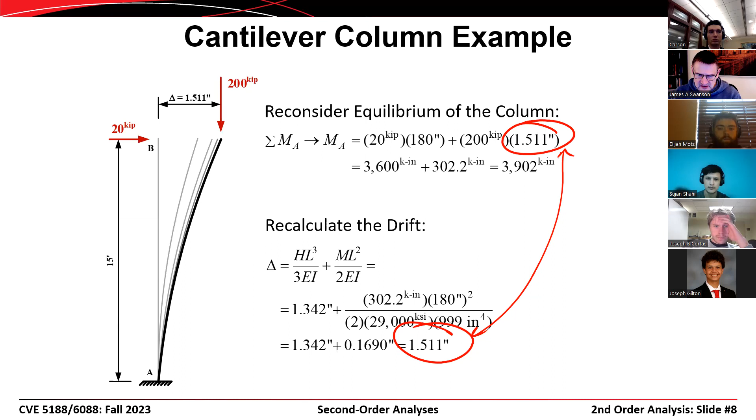That difference can mean the difference between a member being satisfactory and a member being not satisfactory. And so it can be important to model that.

Then we went on and considered a more sophisticated structure, one with two columns instead of one column, and illustrated the idea that the second order effects in the building aren't just isolated to the members that are participating in the lateral resistance of the structure.

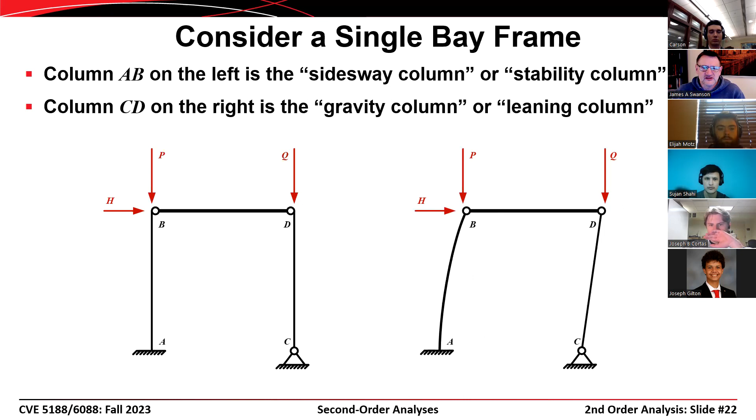We often, particularly in steel structures, break our columns out and categorize them as either columns participating in the lateral resistance of the structure—lateral columns or side sway columns—or columns that are there just to carry gravity loads, called gravity columns or leaning columns.

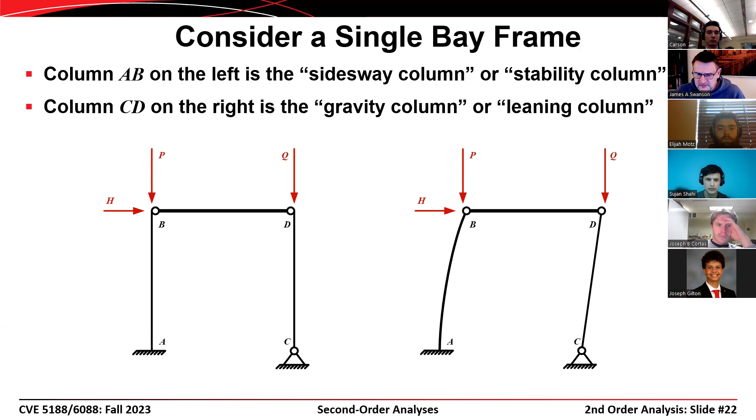We presented this rudimentary example where we have the load on the leaning column Q that acts to destabilize the lateral column. The column providing lateral stability, column AB, is actually carrying the load that is on itself plus the load that's on the leaning column.

Then we went through and did some examples in SAP 2000, and I showed you how to turn on the P-delta analyses and what you have to do with respect to automatic meshing in order to capture P-little-delta effects, et cetera.

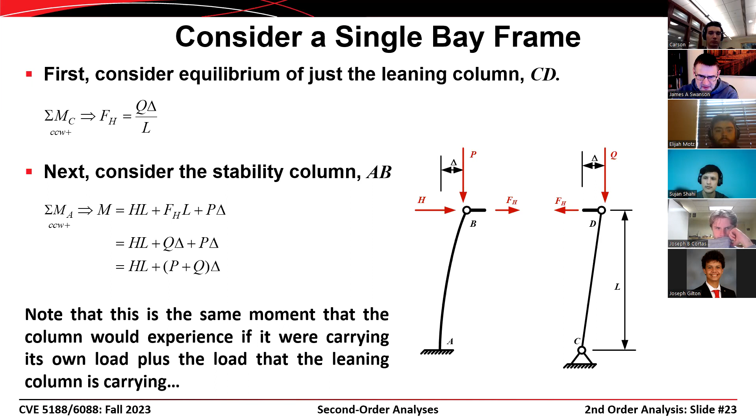What I wanted to start off with today is circle back to this presentation and wrap this up and talk about how we handle analyses of structures from a practical point of view.

This is later on in the presentation—I don't think we've covered this yet. We have slide number 33, where we're illustrating again the idea between a P-little-delta analysis on the left, where little delta indicates a deformation along the length of a member in between nodes, and P-big-delta effects there on the right.

This is a topic that's evolved quite rapidly over the past 20 to 30 years, certainly in the context of AISC, but probably also in the context of ACI, and the terminology has changed quite a bit as well.

If you go back a few editions of the standards, the situation on the left would be referred to as a non-sway analysis, or NT for non-translation. So non-translation, non-sway—two different words that just act to confuse things.

The one on the right is a sway analysis, where you could envision a moment resisting frame being pushed to one side because of lateral loads like wind or seismic. We used to break these down in terms of a non-sway or NT analysis and an LT or sway analysis—lateral translation versus non-translation.

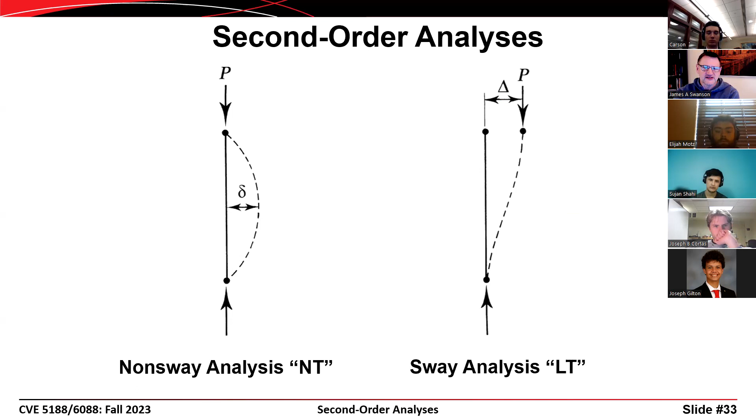These geometric second order effects aren't the only types of effects we can account for. We could include material nonlinearity as well. All the models we've considered so far are based on the idea that the material is linear and elastic.

We provide a modulus of elasticity, we might provide a shear modulus of elasticity, but what we don't generally provide is a yield stress and/or a tensile stress. So what we could do is define a full stress-strain curve for the steel or concrete from which our structure is constructed.

That would give us a nonlinear response, not necessarily with respect to geometry but instead with respect to material. You can include both, though material nonlinearity isn't as convenient or as easy to illustrate as geometric nonlinearity, and when you do, you increase the complexity of the model even further.

When we talk about types of nonlinear analyses, we have both geometric nonlinearities and material nonlinearities as well. When you move from a first order linear elastic analysis to a second order inelastic analysis, you increase the complexity of the model quite a bit.

SAP 2000 does offer the option of including material inelasticity or nonlinear material analysis, but it's not as sophisticated as a program like Abaqus or ANSYS would be.

You have to define locations where you expect yielding to occur, and then set up something called an analytical hinge or a FEMA hinge. FEMA is the Federal Emergency Management Agency in the US.

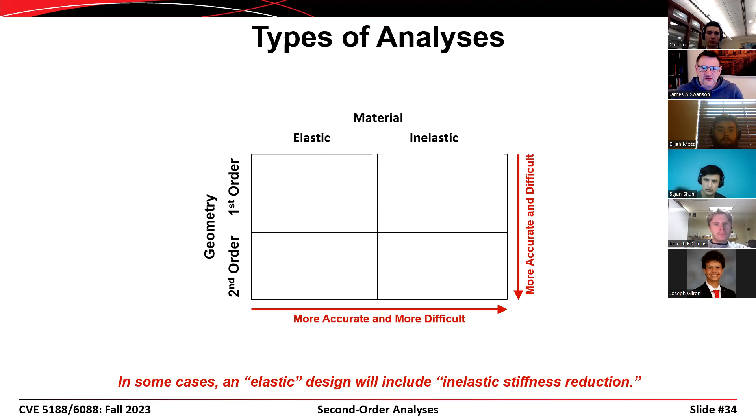They were one of the first groups to define an analysis where you define these hinges or hinge locations within a structure, and then as you apply the loads, you can capture the potential for that material inelasticity to occur.

Different material models include an elastic model, the simplest, where you just have a linear relationship between load and displacement. And then you could have an inelastic analysis.

With the inelastic analysis, you could have an elastic, perfectly plastic model, an EPP model. If we illustrate that, the stress strain curve would show stress that's linear up to the yield point, F sub y, and then perfectly plastic beyond that. So this would be an EPP model.

You could have a more sophisticated, but still not perfect, model where you have an elastic range, a plastic range, and then a hardening range. The hardening stiffness is usually about 10% of the elastic stiffness. This would be an elastic plastic hardening model, an EPH model.

In a more sophisticated program like Abaqus or ANSYS, you might define a true stress strain curve. But in that case, you're usually using the true stress and true strain as opposed to engineering stress and engineering strain. The engineering stress and engineering strain are based on the initial measurements.

If you're doing a coupon analysis, you would measure the initial cross-sectional area of the coupon and then calculate the stress throughout the loading based on the original area. Whereas if you were calculating true stress and true strain, you would continuously update the area you're dividing by to calculate the stress as that cross-section shrinks due to Poisson's effect or due to necking based on inelastic behavior.

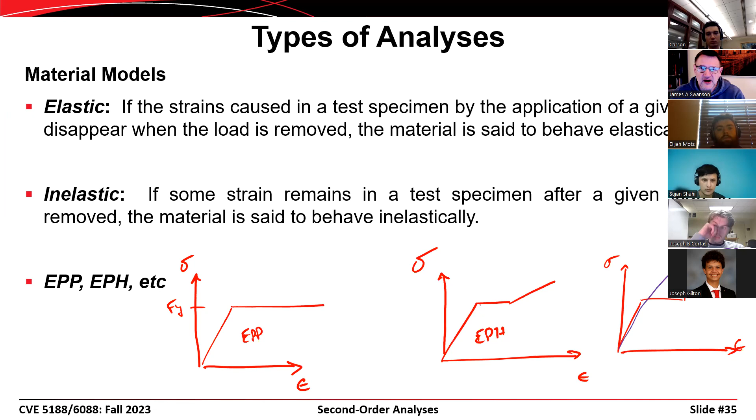If we look at older terminology, we break down the determination of our moments like this: we have a B1 factor times our non-translation moments, and a B2 factor times our lateral translation moments. B1 is a factor that approximates the second order results from a P-little-delta analysis, and B2 approximates the results from a P-big-delta type of analysis.

This is included in an appendix to the AISC standard now, or AISC specification. It's called an approximate analysis.

If you go back 20 years to the 1999 edition of AISC, or maybe even the 2005 edition, this was presented as the default approach for calculating second order effects, because back then we didn't have the capability of running a second order P-delta analysis on a desktop computer. That type of analysis required what we'd call a supercomputer nowadays, and it just wasn't a practical option for most practicing engineers.

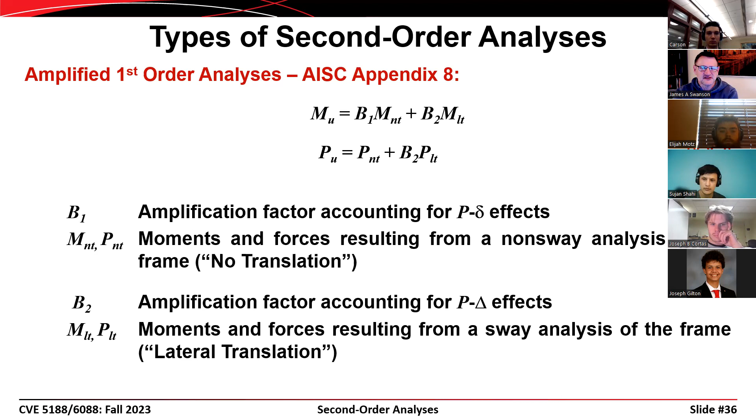But now that we can do P-delta analyses on a desktop computer, this becomes something that's somewhat outdated. Since AISC wasn't ready to completely dispose of it, they put it into an appendix so it maintains its applicability. I suspect that sometime in the near future it will probably be deleted entirely from the standard.

If we look back at the packages we've been discussing, Visual Analysis does a P-delta analysis, but it doesn't do a true rigorous second order analysis. It does a standard first order analysis to calculate the deflected shape of the structure, and then it goes through a second pass based on that deflected shape to estimate what the second order effects are going to be.

SAP, on the other hand, does a true second order analysis where it incrementally applies the load, and then at each load increment, it iterates to find a convergence to a certain criteria.

I think most people would agree that SAP 2000 does a better job of handling this. If you read the fine print of our standards though, ACI and AISC, they don't necessarily say that it has to be a true rigorous second order analysis that we use. We just have to have confidence in the results that we're getting.

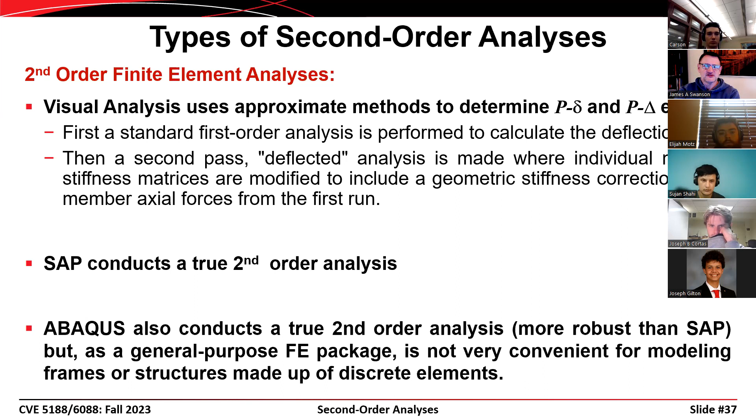And thus you go back to the benchmark problems that we discussed during our last class. If your analysis package can come within a few percent of the benchmark results, then it doesn't matter whether it's an approximate second order analysis like Visual Analysis provides, or a true second order analysis like SAP 2000 provides. ABAQUS, my default continuum modeling program, does a true rigorous second order analysis and is much more robust than SAP 2000. It offers several different solution options, including Newton-Raphson, modified Newton-Raphson, an arc length method, and all kinds of different options that are well beyond the scope of our discussion here.

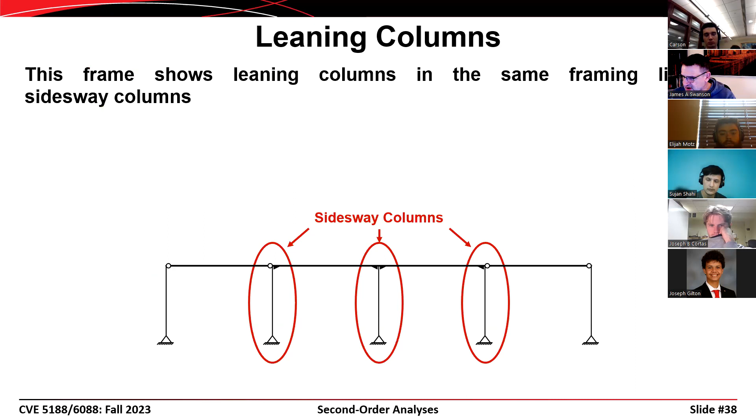If we put that load on again and look at the bending moment diagram in these 2 outer columns, those columns wouldn't carry any bending moment at all. So their flexural stiffness does not contribute to the stability of the structure. Those are leaning columns.

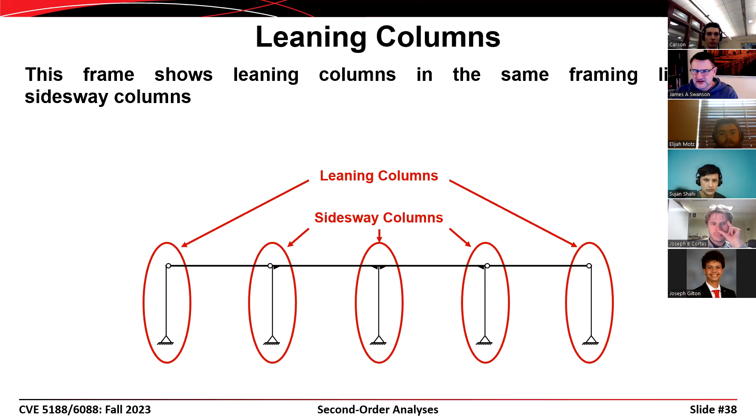We often want to account for leaning columns, but it's not always convenient to model explicitly every gravity column that's in our structure. So one approach to doing a 2D model is to have all of the leaning columns represented by a single column line in our building. We would take both of these leaning columns in the actual structure and put their loads on one hypothetical or analytical column line called the leaning column line. That seems somewhat ridiculous to do when we're looking at a 2-dimensional structure like this one, where we could just put both columns in there.

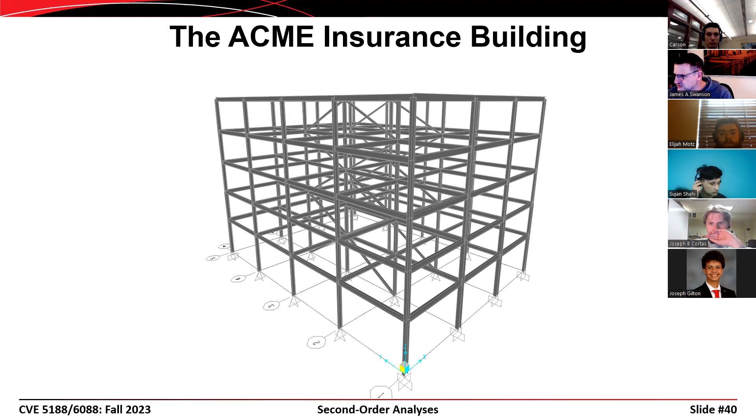But when we go and look at a 3-dimensional structure, the utility of this approach becomes more apparent. This is an old structure that I used to use in steel design, but I've more or less retired it. Let's go ahead and use it as an example anyways. I call it the Acme Insurance Building, just for lack of any originality in naming these structures.

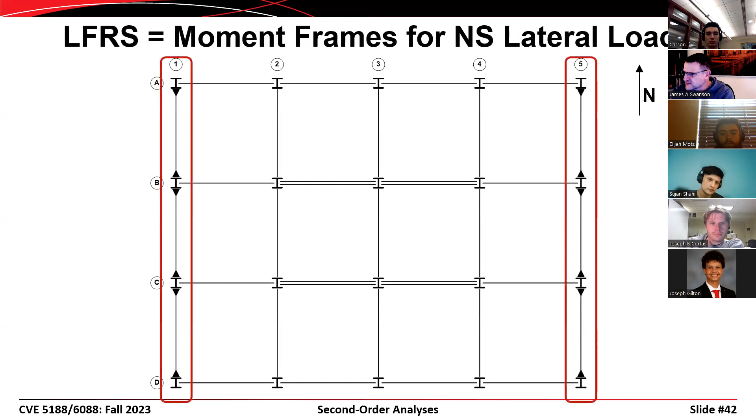It has lateral framing in the north-south direction that's composed of these moment resisting frames on framing line 1 and 5. If we take a look at those moment frames, you can see there's rigid connections everywhere. So if we put lateral loads on here, you'll see bending moments in each one of those members.

If we look at the lateral framing in the east-west direction, I have 2 brace frames, located near the core of the building. That would probably be more typical than having the brace frames near the perimeter like we have in the Tower of Terror. If you have the brace frames out on the perimeter, they do a better job of resisting the torsion the building might see, but it's challenging to accommodate them architecturally because the braces tend to pass through windows and things like that. If you put them near the core, you can hide the brace frames in elevator shafts and things of that nature, and you don't actually see the braces.

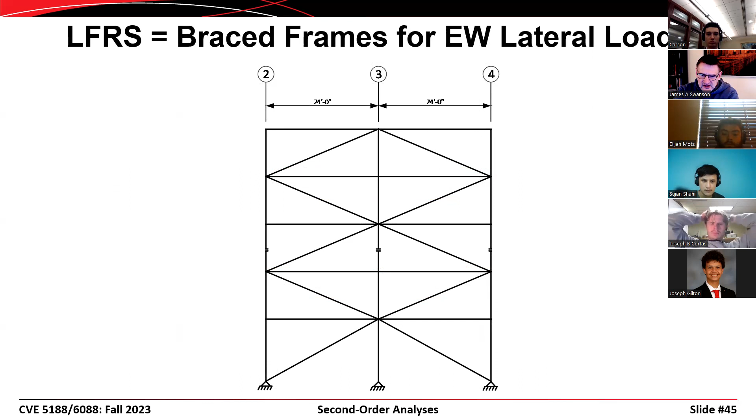If we look at an elevation view, I have 2 bays of framing, diagonal framing in each direction. It looks kind of like a 2-story X, 2 bays wide configuration. So if we're looking at stability columns versus leaning columns, we have to distinguish between lateral forces acting in the north-south direction versus lateral forces acting in the east-west direction.

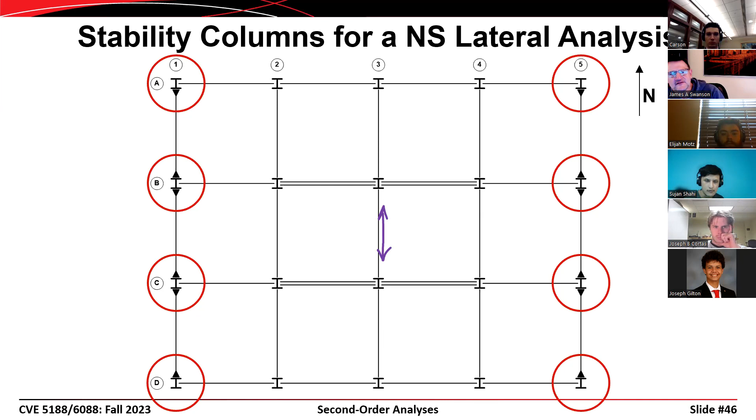If we're looking at a north-south lateral analysis, that is lateral loads moving in this direction, then columns in column lines 1 and 5 are the stability columns or the lateral columns for the structure. All of the other columns are leaning columns with respect to that north-south loading.

Even the columns that are part of the brace frame are leaning columns when it comes to a north-south analysis. So when we go and do an analytical model of this, typically what I'll do is construct a model of the moment resisting frame, and then construct a hypothetical column line out here on the edge, column line L, that represents all of the leaning columns that are tributary to that moment resisting frame. Let me see if I can illustrate that a little bit more clearly.

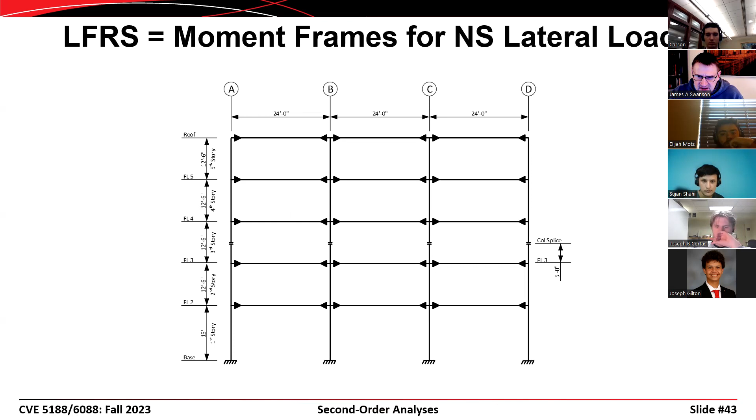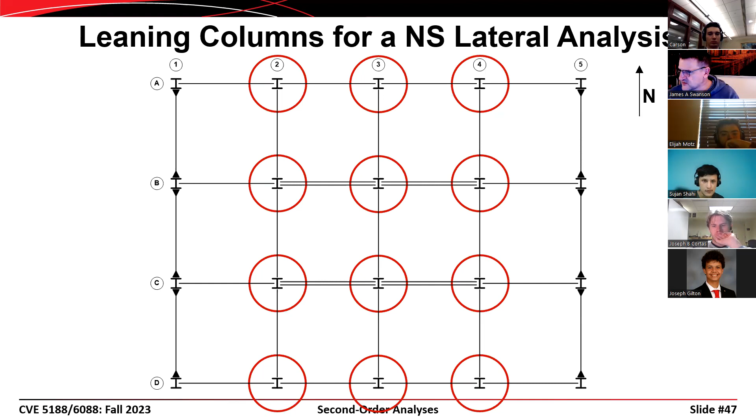So let me go back here, and when we look at how we're breaking this out, all of these are the leaning column lines with respect to a north-south analysis. So there would be a load on each one of these gravity columns with respect to the north-south analysis, and we would come in and put the load from all of these columns, or at least the ones that are tributary to one of the moment frames, on that hypothetical analytical column line.

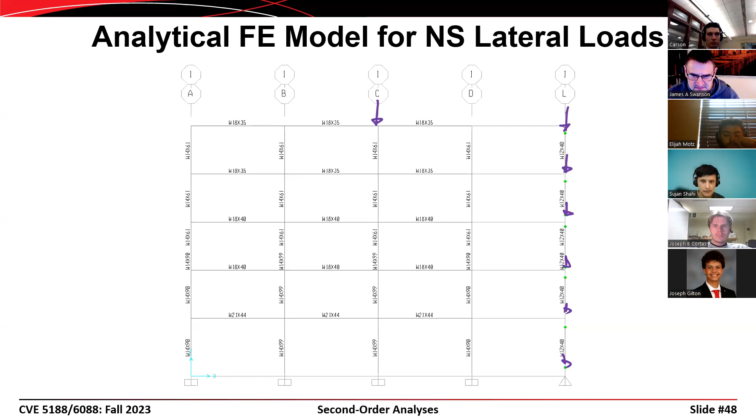So where'd it go? There it is. So you would have loads on this column line here that are much larger than what you would see on the other column lines. So if we look at this load, let's say a load right there, if we go back and look at a plan view of our structure, then the load on that particular column would be based on, say, this tributary area right here.

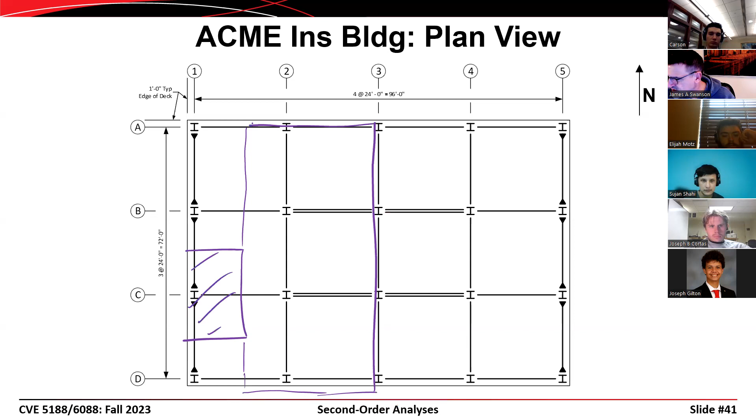But if we look at the load that's acting on our column line L, what we would do is take the tributary area that goes all the way over to the middle of the structure and use that as the tributary area for column line L. And then everything from the center to the right would be tributary to this frame here, and that would appear on an analytical column line associated with that frame.

In this particular structure, because it's symmetric, you could just model one of the two moment frames and use the results to design both of them. That's how you capture that.

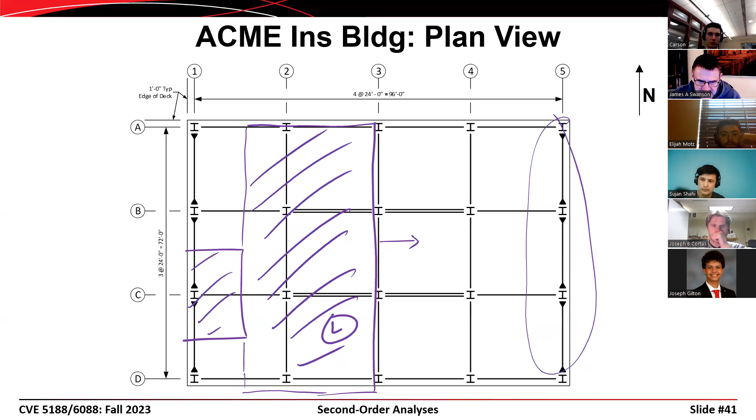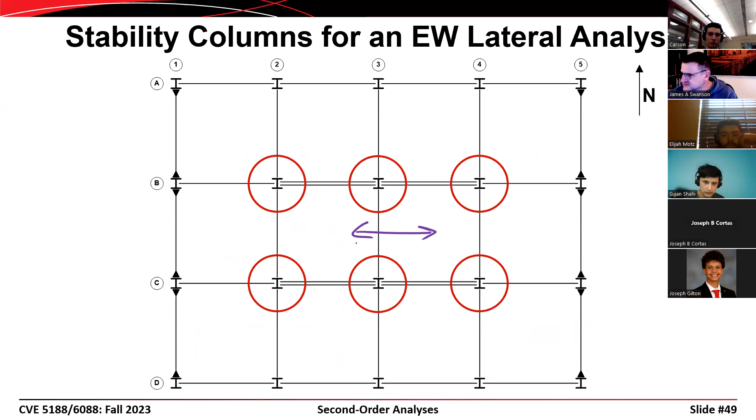Now if we go through and look at a similar analysis for the brace frames in the east-west direction, our load is acting in this direction. Then those become the stability columns, and everything else becomes a leaning column. So even the columns that are part of the moment resisting frames are leaning columns with respect to a stability analysis of the braced frames.

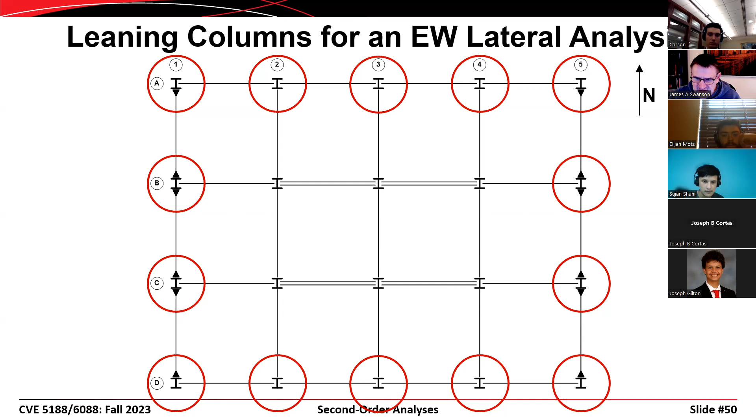So when we go in and look at an elevation view of our braced frames, we would construct a model that has a hypothetical column line associated with that. I don't have a snip from SAP 2000, but what we would do is create another column line over here. I would typically call it L, and then the loads on that column line would be equal to half of the loads that are on all of the leaning columns with respect to the analysis in the east-west direction.

By doing that, you are able to use a two-dimensional analysis to include second-order effects from gravity frames that aren't in the same framing line as the lateral frame that you're modeling. That's a lot in one sentence - I'll say it again. By using this approach, you're able to include second-order effects from gravity columns that aren't in the same framing line as the framing that you're modeling in SAP 2000.

So that analytical or hypothetical column line is there to capture not just the gravity columns that are in the same framing line as this brace frame, for example, but they're there to capture the gravity columns that are in the structure entirely.

This is necessary because all of those other gravity columns tend to carry a larger amount of force than the loads that are on the side sway columns. And when you include the leaning column loads, they do act to destabilize the structure and increase the forces and bending moments that we designed for.

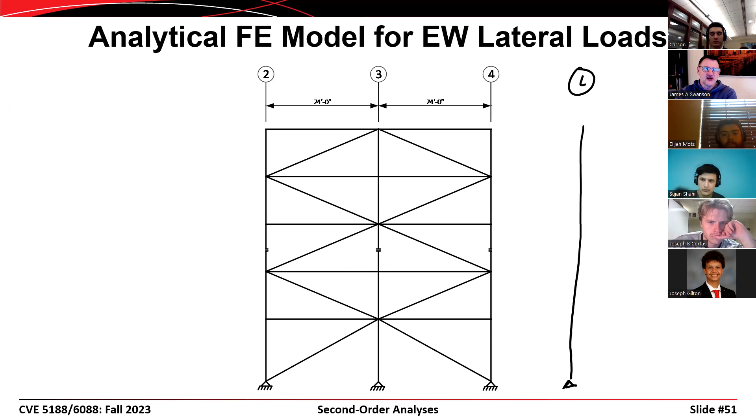And then when you consider the drift associated with lateral loads, the P-delta effects can be quite large. So couple that with the leaning column effects, and it's something you definitely need to account for.

So our other modeling options are to include a full three-dimensional analysis of the structure. If you do a 3D model in SAP 2000, or if you go into something like ETABS and do a three-dimensional analysis, then all of the leaning columns are modeled explicitly, and you don't have to include something like an artificial or hypothetical column line like we've done here.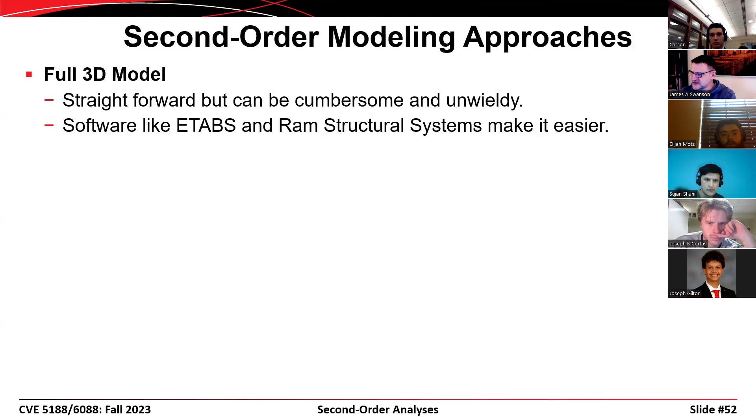The other option is to do partial 2D models of the lateral framing analysis. You could do a 2D model of the north-south lateral framing, including an artificial leaning column line. You could then do a 2D model of the east-west framing, again including an artificial column line. And then you would also have to include accidental torsion and inherent torsion that we would get from...

What do we call it? An in-plane analysis of the structure. A lot of times you'll see these things labeled L in a model. Other times you'll see them labeled ACL, which stands for artificial column line or analytical column line. That's what they're there for—basically to capture the effects of leaning column lines in a 2D model.

So you guys are two generations removed from me at least. And so you might think, well, gee, if we could do a 3D model, then why not do a 3D model and just be done with it? Then we don't have to mess around with all of this. And that's perfectly fine—you can do that.

But there's a lot of value in doing a 2-dimensional analysis, because you can, at least I can, see a 2-dimensional analysis and have a much better feel for the results of that analysis than I can a 3-dimensional analysis. When I go in and look at a 3-dimensional analysis and try to plot bending moment diagrams and shear force diagrams and things like that, I have to be very specific.

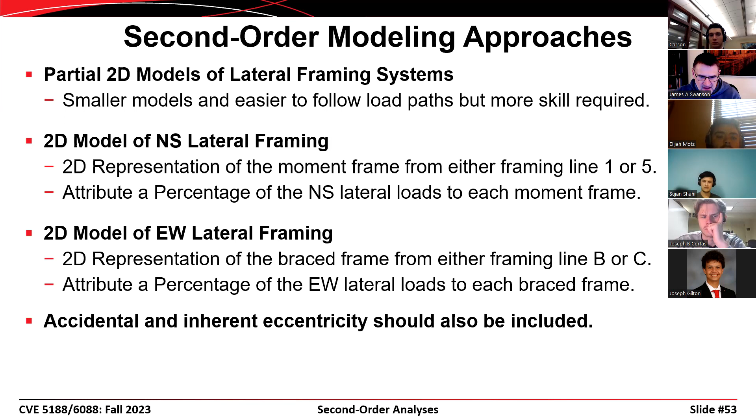All right, so then what I added recently—well, by the way, if we go in and look at that Acme Insurance building, here's what we get when we look at a 2-dimensional model of the moment resisting frames in the north-south direction.

If we don't include the leaners, we end up with a ratio of delta second over delta first equal to 1.04 - that would basically be the B2 factor I alluded to earlier. But if we include all those leaners, we end up with a delta second to delta first ratio of 1.16. So accounting for those leaning columns, even the ones in different framing lines than the moment frames, makes a big difference in the results we get from our analyses.

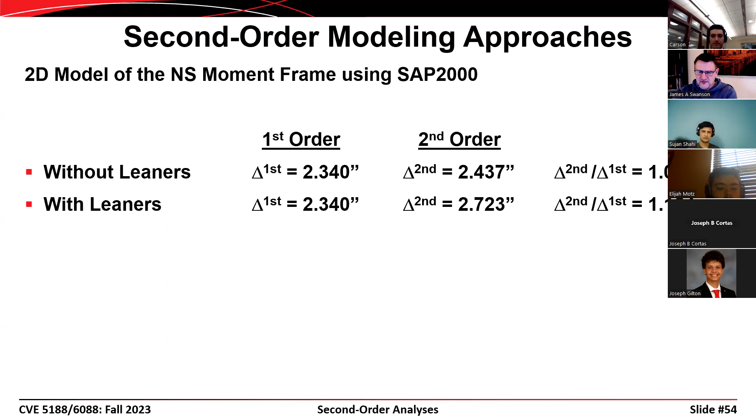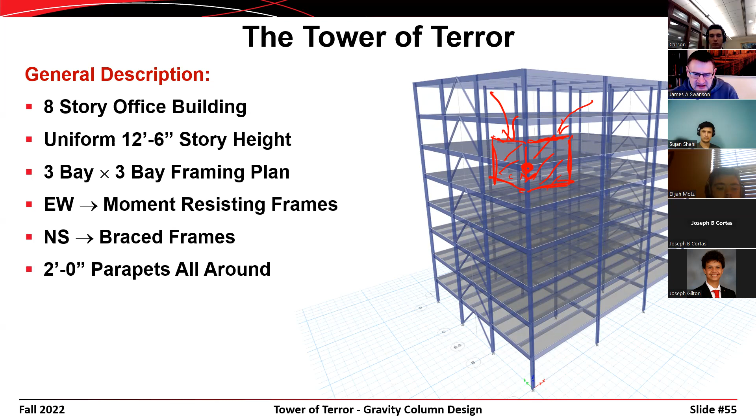This is new material that I added when I posted the updated lecture. We've been using this Tower of Terror as a case study for the class, so I thought I'd include a similar discussion for it, since it's a structure you're more familiar with than the Acme Insurance building. Excuse me, I've got leftover ink here from the last time I used this lecture - I forgot to delete that.

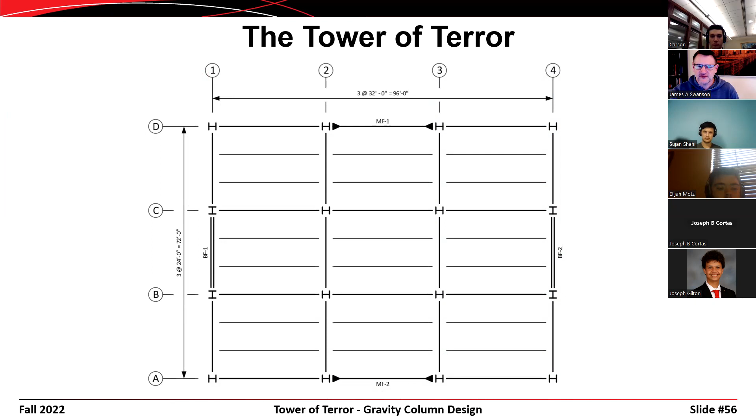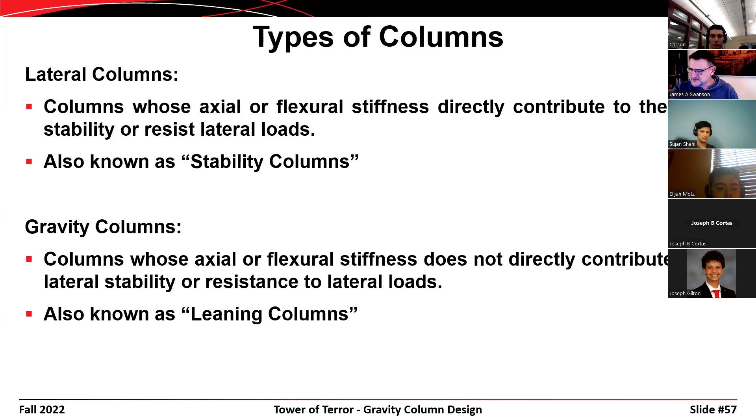So again, remember we have an 8-story structure that's rather simplistic in its framing plan. We have brace frames on the perimeter in the north-south direction, and moment-resisting frames on the perimeter in the east-west direction. If we look at our columns, we have lateral columns known as stability columns - these are columns whose flexural stiffness directly contributes to the lateral stability of the structure. Then we have gravity columns, also known as leaning columns.

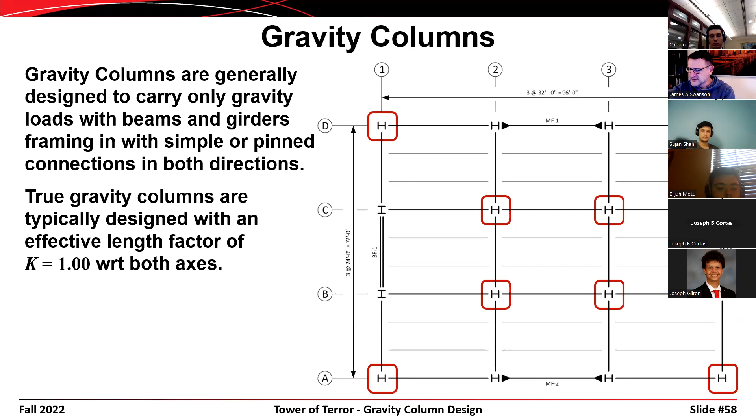If we look at analysis of the structure, it doesn't matter whether we're looking at east-west loads or north-south loads. All of these columns are going to be leaning columns because they are pinned with respect to both framing coming in from the east-west direction and framing coming in from the north-south direction. So when we design these columns, we would design them with a K factor equal to 1 with respect to both axes, and they act to destabilize the lateral framing with respect to both axes.

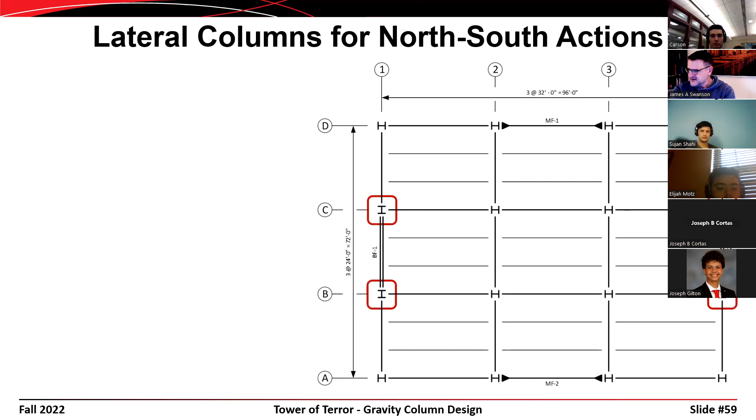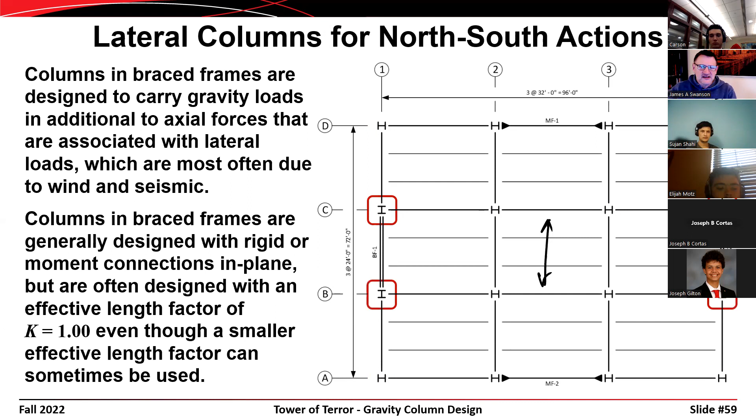Now, if we look at framing in the north-south direction, these columns are the lateral columns - the ones participating in resistance of loads acting in that direction. So those would be the stability columns, and these columns are part of brace frames. They're typically designed with a K factor equal to 1.0, even though a lower factor might be justified if you use the alignment charts or whatever.

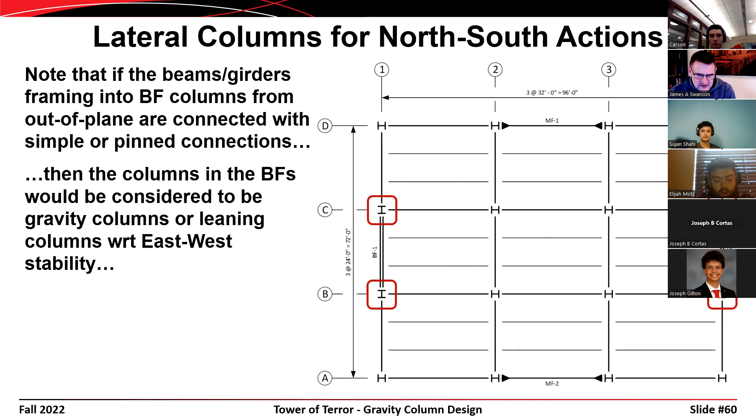But when we do an analysis of these columns, we need to make sure we include the leaning column loads on that. And then, sorry, I've got some stuff coming in here that isn't necessarily germane to this particular discussion.

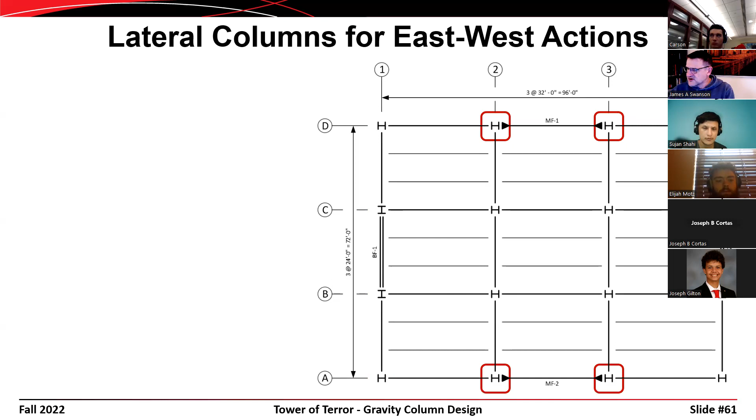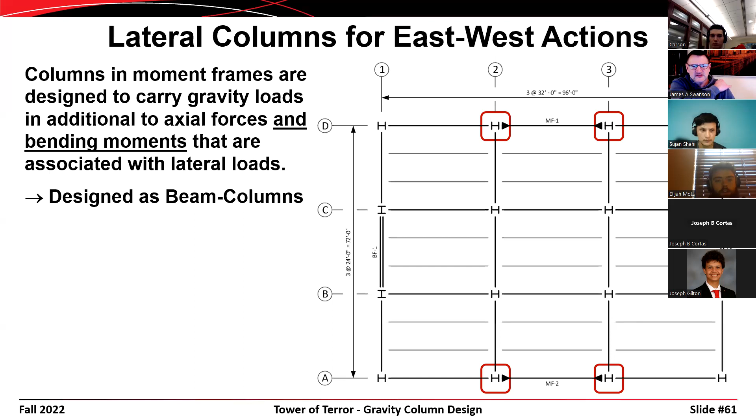When we go through and look at lateral stability in the east-west direction, those are our stability columns - the columns that are part of the moment-resisting frames. So those would be the stability columns, or the side sway columns, in that east-west analysis. These would be designed as beam columns, and they would have a K factor that's probably larger than 1, based on alignment charts or whatever method you're using for design.

So let me get rid of these timings - they're kind of annoying me. Let's see, where's that at? Slideshow, use timings. Yeah, I'll get rid of those.

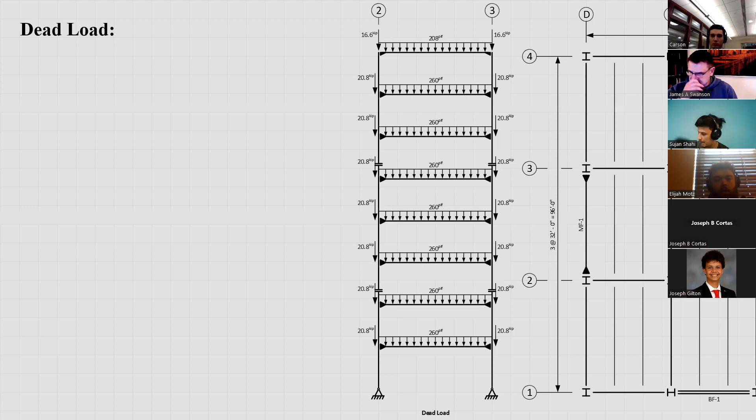So when we go through and do our load takeoffs, we need to use a tributary area or tributary width approach in order to capture the loads that are on our frames. We discussed this at length some weeks ago, 3 or 4 weeks ago.

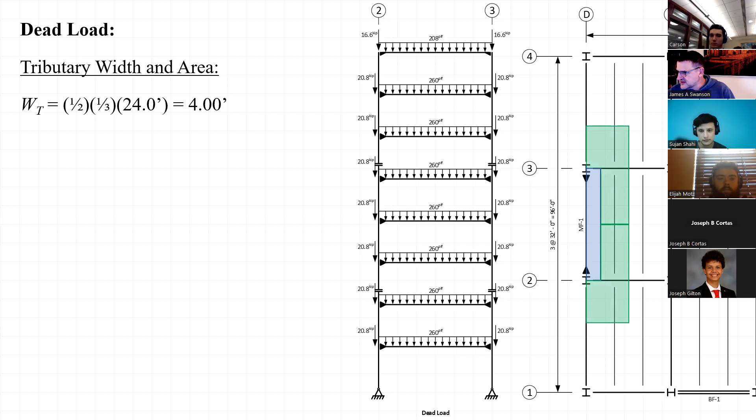As a review, if we look at the dead load on one of our moment resisting frames - note that I've taken the frame and rotated it 90 degrees so it fits nicely along the vertical edge of this slide. If we look at the tributary width and tributary area associated with that frame, some of these loads are applied as uniformly distributed loads to the beams in our moment resisting frame, with a tributary width of 4 feet. Then we have some loads that enter as point loads on the columns, and the tributary area associated with those point loads is 320 square feet.

So we can go through at the roof level and calculate the uniformly distributed load there. It's 208 pounds per linear foot. And at the roof level, we would end up with point loads that each have a magnitude of 16.6 kips.

Then at each floor level, where the dead load is a little bit larger, it's 65 pounds per square foot instead of 52 pounds per square foot. We have a uniformly distributed load of 260 pounds per linear foot and point loads that have a magnitude of 20.8 kips. But if you look at the framing for this structure, you can see that there are a lot

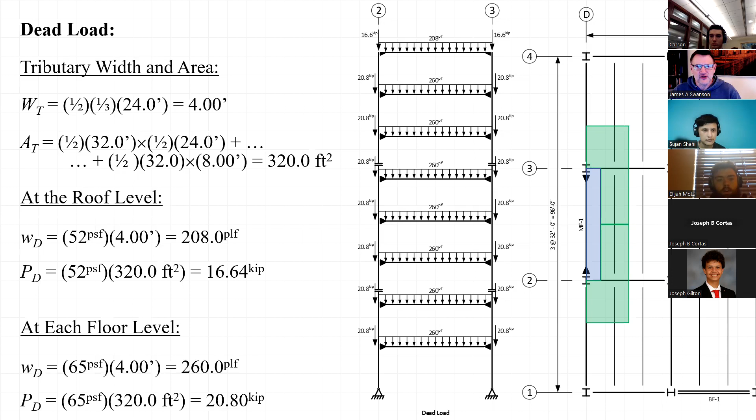of lateral leaning columns as well. And so we need to account for those leaning columns. And so what I'm going to do is take everything else that's to the left of the middle of this frame, and I'm going to categorize it as a leaning column load.

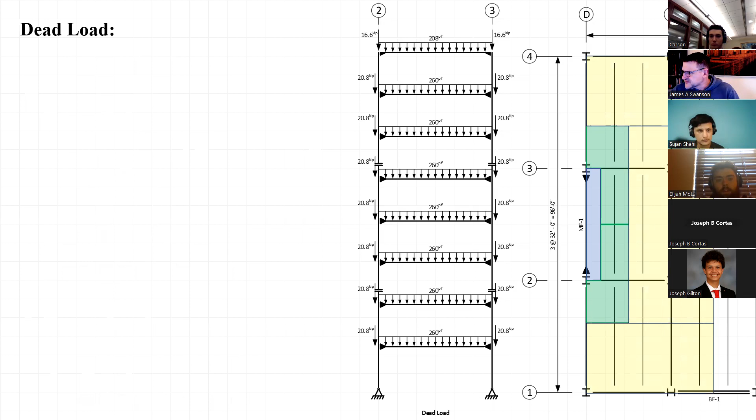So basically everything that's in this tributary area is going to be captured on an artificial column line or an analytical column line. So you could go through and do some arithmetic and calculate the area of that yellow shaded area there. And if we did that, we would find that it has an area of 2,688 square feet.

So what you can do then is go to the roof level. You could calculate the point load that's associated with that, 139.8 kips. And then at every floor level, you would calculate a point load that has a magnitude of 174.7 kips.

And so when you create your model, or when you construct your model in SAP 2000, what you would do is include a leaning column line or an artificial column line that has all of those loads on it.

And so when you look at the loading here, it might look absurd at first to have a load here on the column that's only 20.8 kips, but a load over here on the artificial column line that's 175 kips. But the reason for that is that the loads on the leaning column line are actually reflecting loads that are on more than one column.

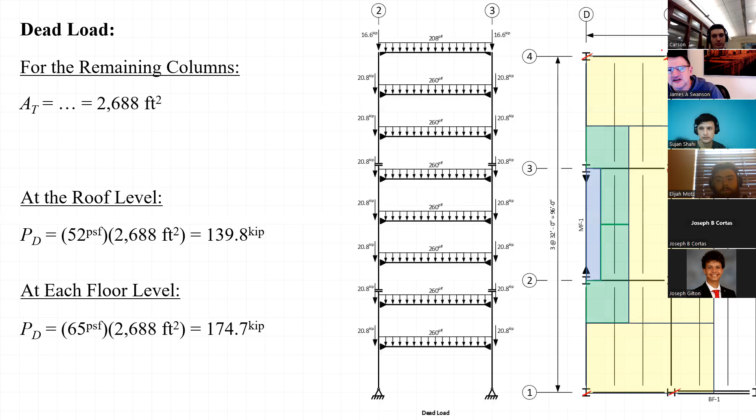They're reflecting loads that are on 1, 2, 3, 4, 5, 6 columns. So in this case, the loads that are on our leaning column line or our artificial column line should be approximately 6 times the load that is on the individual columns.

So you take 6 times 20, you get 120. We're at 170, but some of those columns are edge columns, some are corner columns, some are interior columns. So it's not quite as cut and dry as that.

So then you go into SAP 2000, then you would include that artificial column line. And then you could do one of a couple of things. You could tie these columns in using rigid links or artificial members like that, pin them at the ends. Or you could use a diaphragm constraint.

And if you constrain the nodes that are in the artificial column line, then those nodes will automatically translate left and right to the same amount as the nodes that are in the actual model.

And another thing that I'll often do when I'm modeling these artificial column lines is I'll include a property modifier on the area. I'll call it an area property modifier. And in this case, I would set that equal to 6 because that column line actually represents the loads that are on 6 physical columns.

I'll say that one more time, maybe a little more clearly. The artificial column line or the analytical column line actually has loads on it that are representative of 6 physical or actual columns. And so one of the things you have to worry about is that when you put these loads on, these columns tend to shorten a little bit.

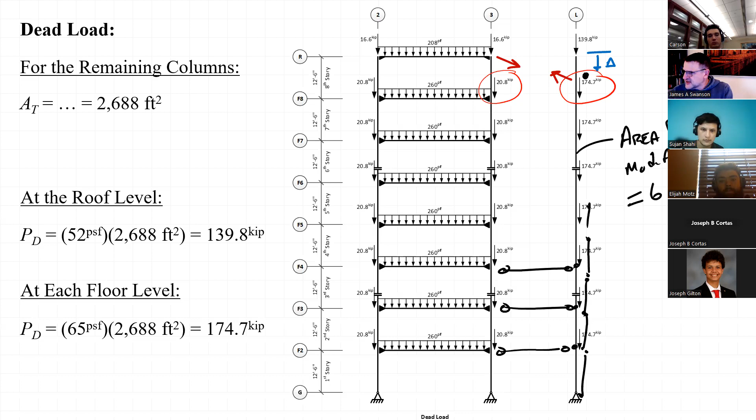So I've illustrated the idea of these load takeoffs here for the moment resisting frames—sorry, I got ahead of myself.

But if we spin the model around and look at the brace frame model, the same exercise could be completed. If you go to the Word document or PDF document I posted with the loads, you'll see I include the magnitude of the loads on the leaning column line for both east-west and north-south analysis. So here's a model of the brace frame where you have the loads on the physical members, and then the loads on the leaning column line.

I think it's just a coincidence, because the framing in this structure is so simplistic, that the loads on the leaning column line for the braced frame are the same as for the moment resisting frame. I don't think that's a hard and fast rule that holds in every structure, but it happens to work out here because we have such a simplistic structure, with 2 brace frames and 2 moment frames, and everything rectangular.

But if you went to any realistic type of framing, you would probably not see that.

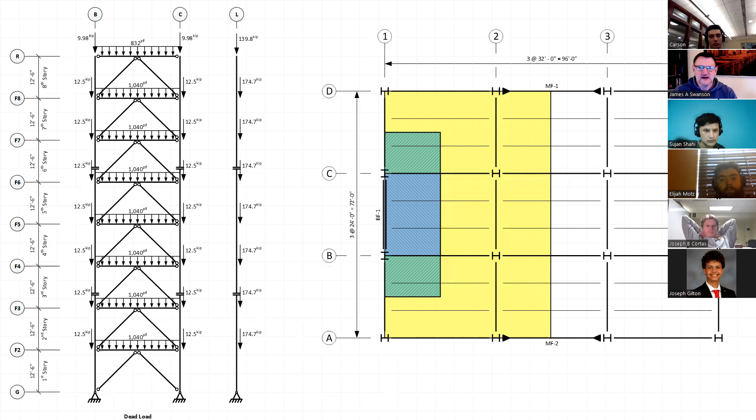All right, so that brings us to the end of this lecture. That should give you a basis for how to construct your model for homework number 9, where you would include an artificial column line, or leaning column line, for both the brace frame and moment resisting frame analyses done in 2 dimensions.

Homework number 9 also includes a mention of notional loads, and those are associated with a different type of modeling—something I'll call loosely the direct analysis method, associated with the American Institute of Steel Construction standard. So this is getting a bit specific with respect to steel structures.

I apologize that I don't have a companion analysis associated with the ACI standard, but frankly, a second order analysis is probably more important with respect to a steel structure than a concrete structure, because steel structures tend to have a higher number of gravity columns, or gravity-only framing. And in a concrete structure, it's hard to make gravity-only columns.

If you're pouring concrete, it's hard to make a pinned joint between a beam and a column. So in cast-in-place concrete, all the joints between beams and columns tend to be rigid, making it really difficult to create a true gravity column or leaning column in a concrete structure.

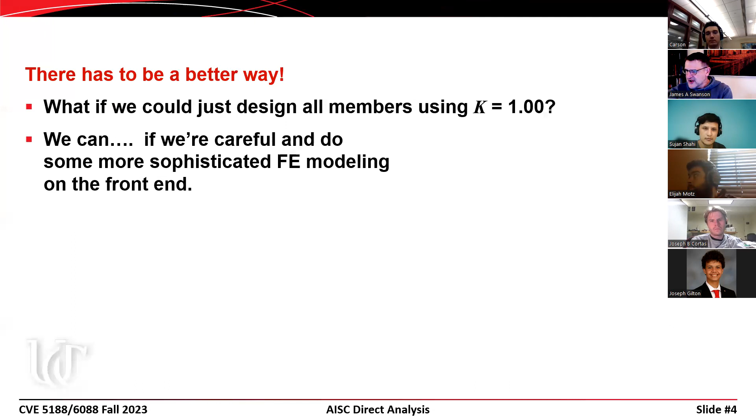So it turns out there's a better way. What if we could just design all of our columns for a K factor equal to 1 instead? We can do that, but in order to do that, we have to do something a little more sophisticated in our analyses.

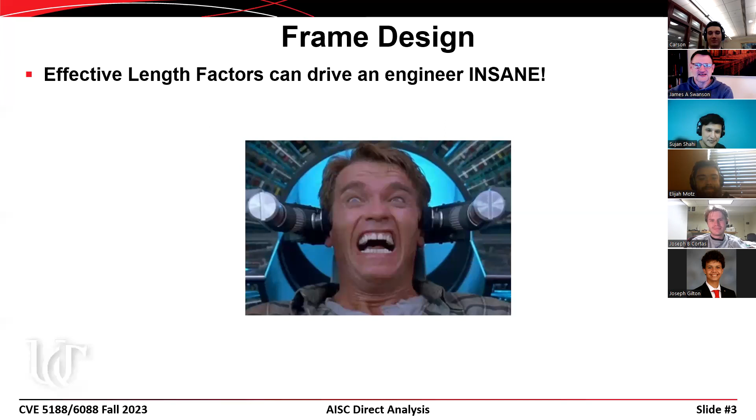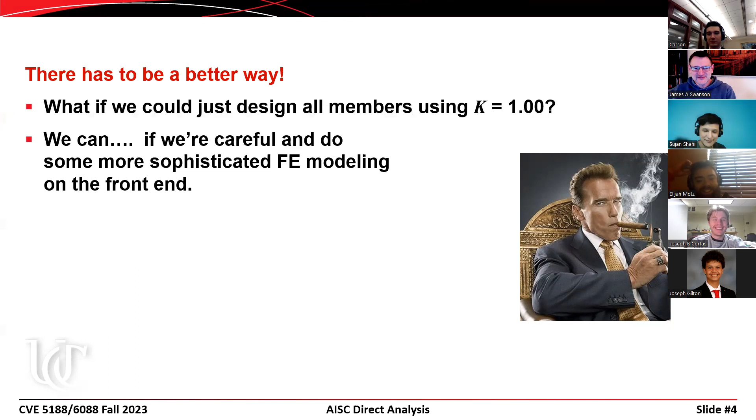So when we go to AISC, they have a definition of design, and this definition is important. I think everybody knows what design is, but AISC is very specific in how they define it. They say it's the process of establishing the physical and/or other properties of a structure for the purpose of achieving the desired strength, serviceability, durability, constructability, economy, and other characteristics. They go on to say that design for strength includes an analysis to determine the required strength and the proportioning to have adequate available strength.

So I call this out because when I use the word design, particularly in steel design class, I'm usually saying we're going to select a member for the loads. But AISC says that when they use the word design, they mean it to include both the analysis required to get the forces you're designing for and the actual proportioning of the members. So their design process includes both the analysis and the design. In that definition, they've basically included the idea that the type of analysis you perform as part of designing a steel structure is as important as the proportioning of the members.

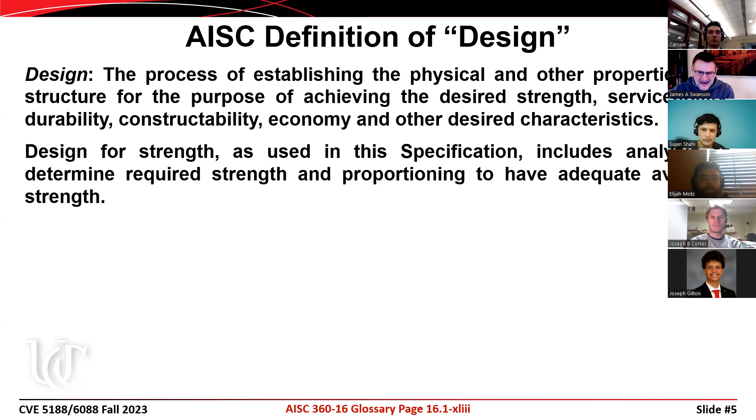And so then they go on and define a number of different ways of performing that analysis. It's part of the design, but how do you actually go about designing a frame? If you read the fine print in AISC, it says any rational analysis method can be used. Some firms are comfortable deciding to do this, this, and this, and as long as that method is rational, everything is kosher. But on the other hand, AISC actually goes on and defines a few other methods that can be used.

So here's where it is. It's actually in section C1. Those of you that have taken undergraduate steel design know that I tend to avoid chapter C like the plague because it's a Pandora's box. It's a lot of fun for dorks like me who like this type of analysis, but when I introduce this in undergraduate steel design, the focus tends to shift away from the behavior of the steel members towards the analysis of the structure, and I'm not sure that's entirely appropriate.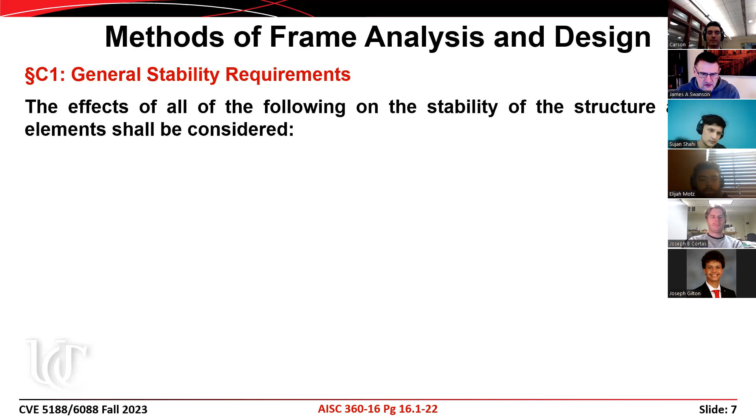So if we go in and read section C1, it talks about the stability requirements. What it says is that the effects of all of the following on the stability of the structure and its elements shall be considered. This is what they refer to in committee meetings as the big five - the 5 things you have to include in any rational analysis of the structure associated with its design. You have to account for the deformations that contribute to the displacements of the structure.

You have to consider second order effects, both P big delta and P little delta - here's where it says in AISC that you need to do this. You have to account for geometric imperfections, meaning that we assume generally that our building is going to be perfectly plumb and that there aren't going to be any initial out-of-straightnesses associated with the members, but that's not always a safe assumption. You have to account for the possibility that your structure is constructed out of plumb, and that members aren't perfectly straight.

You also have to account for stiffness reductions due to inelastic behavior. If you have a column that's loaded heavily, the failure mode that tends to govern is inelastic flexural buckling. If you have a beam loaded to near failure, we recognize that most beams are governed by their plastic moment if adequate lateral bracing is provided. And when you get to the plastic moment of a beam, you have inelastic behavior that has to be accounted for in your analysis.

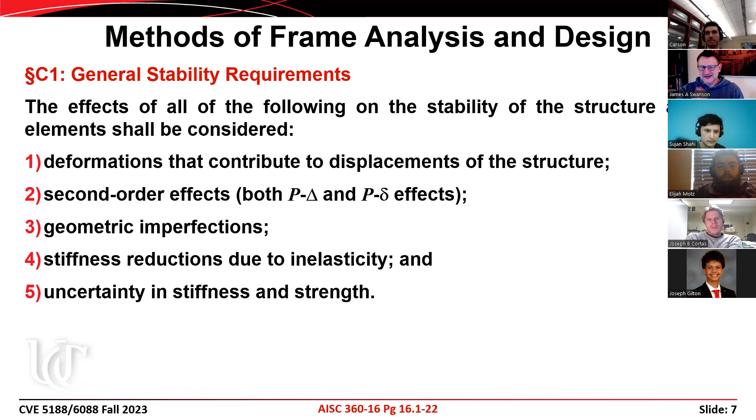And the fifth one is uncertainty in the strength and stiffness of the structure. What's ironic about this - we'll get to this later, probably not today - is that it says you have to account for second order effects, but it goes on later to say that if the second order effects are small, then you don't need to account for them. That's rather ironic and almost idiotic, though I probably shouldn't say that in a lecture that's being recorded, because in order to prove that the second order effects are small, you have to do a second order analysis to show that they're small enough that you don't need to account for them. So it's rather ironic, but anyways, that's the way it is.

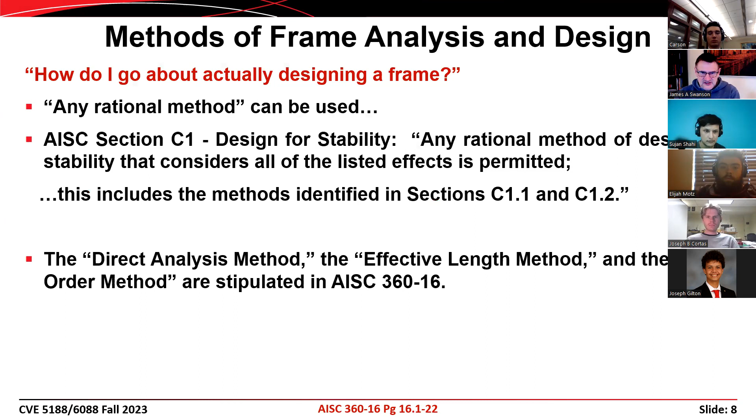So how do you actually go about doing it? Any of the rational analysis methods include the methods identified in section C1.1 and 1.2. These include the direct analysis method of design, the effective length method of design, and the first order analysis method of design, all stipulated in AISC 360. So when we go through and discuss these, that's what we're going to be referring to.

There's also a fourth method called the simplified method. It's not in the actual specification itself, but it's outlined in chapter 2. It's just a really, forgive me, dumbed down version of the effective length method that can be applied to a lot of 1-story, 2-story types of buildings.

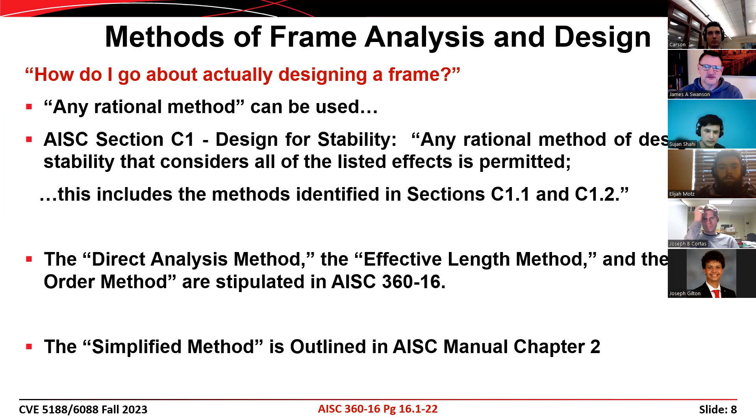So when we look at all of these different methods of analysis, here they are summarized. The direct analysis method is in chapter C. The effective length method is included in Appendix 7, Section 2. The first order method is included in Appendix 7, Section 3. And then we have the simplified method that's included in Chapter 2 of the manual. So when we go through and compare each of these, the direct analysis method is the only method that can be used when second order effects are large. When you have a situation where delta second over delta first is greater than 1.5, you have no choice but to use the direct analysis method.

The effective length method and the first order analysis methods can be used when the P-delta effects are rather small, when delta second over delta first is less than 1.5. I'm not sure I'd say those are small, but I'd say when they're not large.

Then you have this other requirement for the first order analysis method that the columns can't be heavily loaded. The demand to capacity ratio has to be basically less than 0.5, but it's not quite that simple, because it's really the demand to the yield ratio that has to be less than 0.5. So you might think, well, where is that ever going to happen?

Well, if you look at a 1 or 2-story building, you might on paper show that you could get by with an HSS 4x4 by 3/16 based on load, but you would probably never put a column that small in a building. You're probably going to bump that up to an HSS 8x8 quarter or 8x3/8. So in that case, the load on the column is probably less than half of the yield load or half of the crushing load of that column.

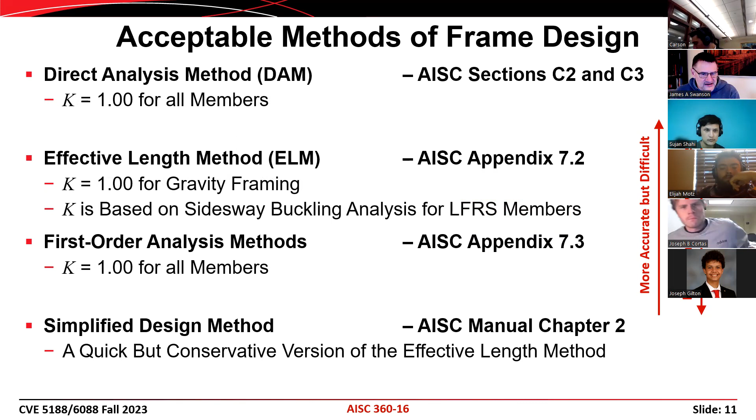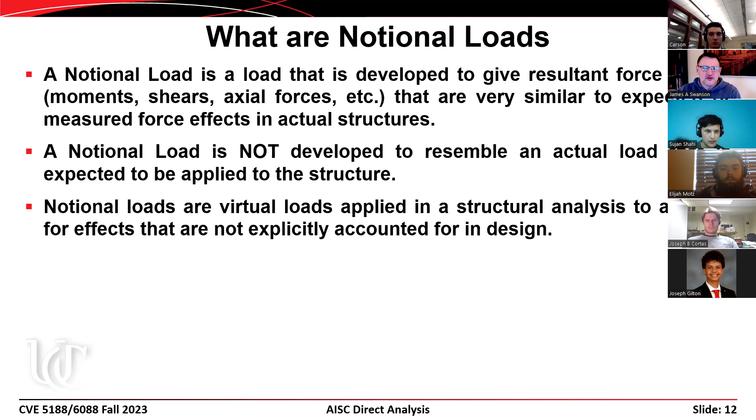In each one of these methods, we have notional loads that are defined. A notional load is a load that's in place to capture resultant force effects that aren't modeled explicitly. A notional load is not designed to resemble the actual load on a structure; they're virtual loads to capture things we're not going to model explicitly.

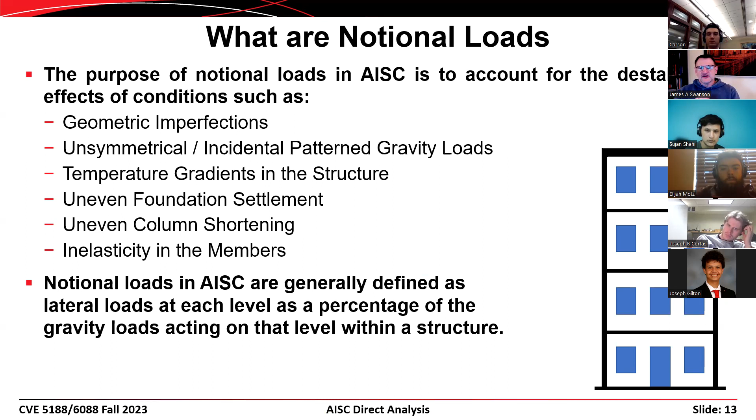Examples of those are geometric imperfections, incidental pattern gravity loads, temperature gradients, and things like that. When we look at a structure like this, we're probably not going to construct a model where the building is initially out of plumb. Instead, it's a lot easier to put a fictitious or artificial lateral load on the building to give us moments in our columns similar to the moments that result from modeling the building out of plumb.